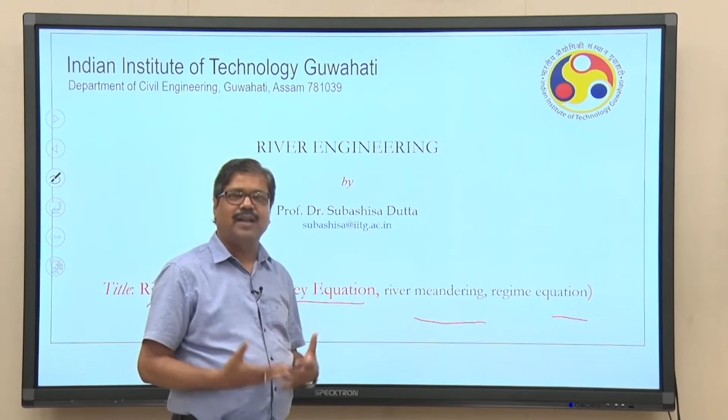Very good morning all of you for these lectures on river equilibriums, in which we will discuss Lacey's equations, river meandering and the regime relationship, which is quite important for us to know. How does a river behave under changing discharge or sediment load conditions? That is the bigger question, and that is what we try to address through the regime equations concept.

Now, if you look at the next part, we are more or less following Julien's book, as well as partly following the experience of Indian Railways engineers on how to protect river banks and river training works for railway bridges. So both these things we are combining to discuss what is the regime concept and how we can use it.

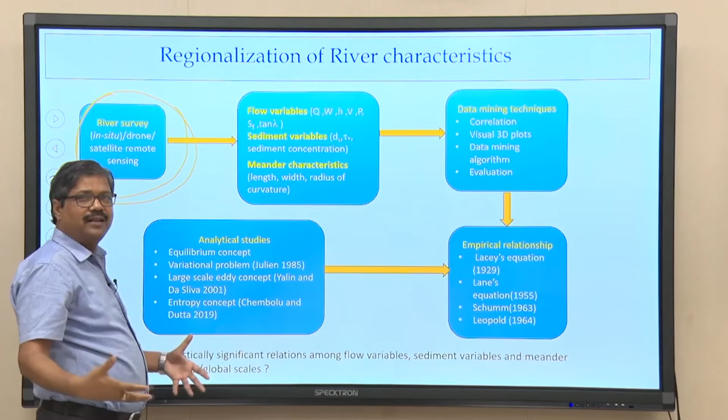If I look at the last slides again, repeating for basic knowledge, first is the river survey, which we can do through field level studies. You can have drone level studies nowadays, or today we can also use high resolution satellite imagery to understand the river planform and river meandering geometries. These are things we can understand about the river and its corridor associations by conducting a thorough survey either at field scale or using satellite platforms.

What do we target? The flow variables, sediment variables and the meandering characteristics. Once you get all this variable data - flow, sediment and meandering - then you try to establish the relationship between them. That is the reason you use data mining tools.

Very older concepts like correlation techniques, now they have 3D visualization techniques, and there are a lot of algorithms in the last two decades that have been developed for data mining from large data sets. There are a lot of examples and also evaluations we can have.

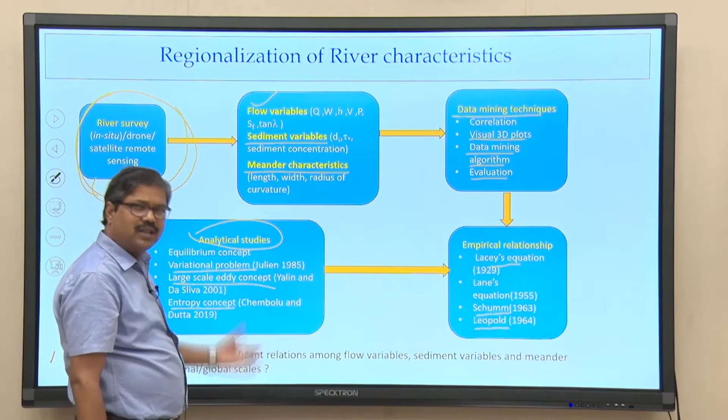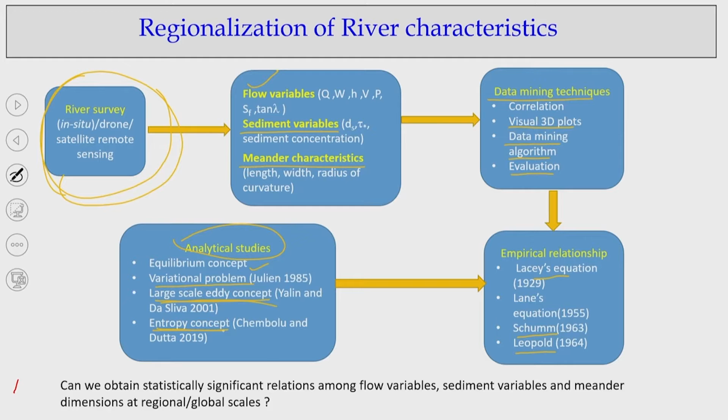So basically these are the equations, the empirical relationships we will discuss today - the Lacey's concept - and as discussed earlier, the analytical studies focusing on variational problems, large scale eddy concept and entropy concept. We try to establish this relationship with the physics: analytical solutions of the river flow with certain assumptions to establish this variation concept, the large eddy concept with the empirical equations, the entropy concept with the empirical equations. That is the advanced level going on, and this is the flowchart of how we can find the regime equations.

Now let me go to the next one, which is very interesting. If you look at the graphical relationships, it talks about a balancing. The river does a balancing between the stream power - that is the energy dissipation - and the carrying of the bed loads. This balancing effect is there in an equilibrium river reach.

So if you look at that, it is a very interesting balance. Try to look at one side as discharge and the stream slope or river slope - discharge multiplied by stream slope indicates the stream power per unit weight, the energy expenditure. That is balanced with bed load and the sediment size.

So if there is an imbalance, either the bank will go for erosion, or there will be aggradation or deposition. If both are balanced, there is an equilibrium stage. If there is a higher value of Q and S - the product of discharge and stream slope, which is stream power per unit weight - that has to be balanced by the sediment size or increasing bed load. That means bank erosion will significantly increase, or otherwise you have aggradation.

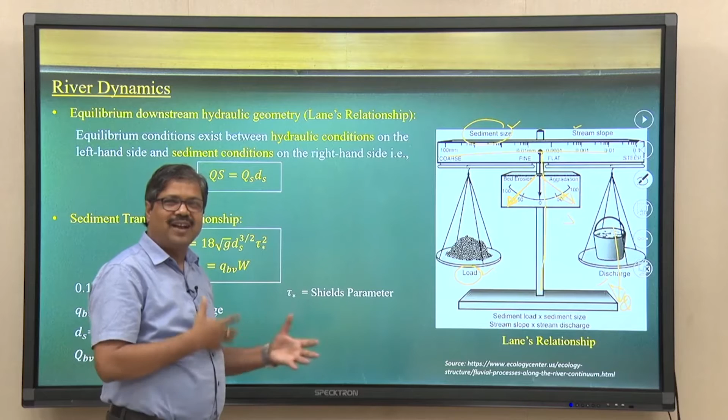My suggestion is that you just sketch these diagrams and try to understand how a river behaves if we change the sediment load, change the discharge, or change the stream slope - like when we do sand mining, we change the bed slope of the river systems.

We have been doing sand mining and gravel mining of the river bed, so we are modifying the stream slope. As we modify the stream slope, what happens - will it be aggradation or degradation? This is a very critical issue in our countries today. If you look at it, you are either increasing or decreasing the stream slope, modifying the D50 value, and mostly we are armoring the bed.

So when we modify the stream slope or the sediment size because of sand mining, there will definitely be a change in the bed load, and because of that change there will be a change in the morphology. That is what we have to try to understand.

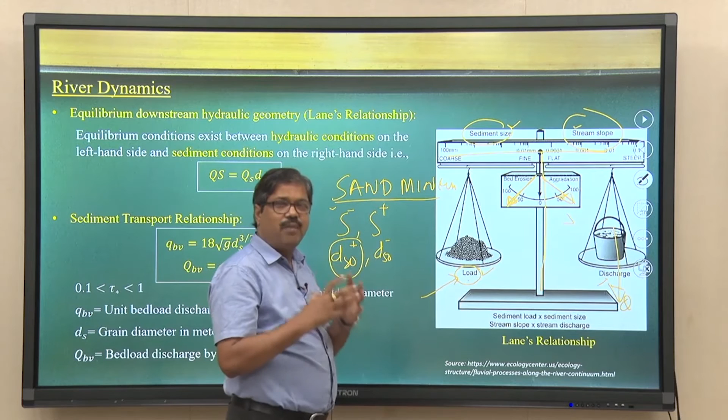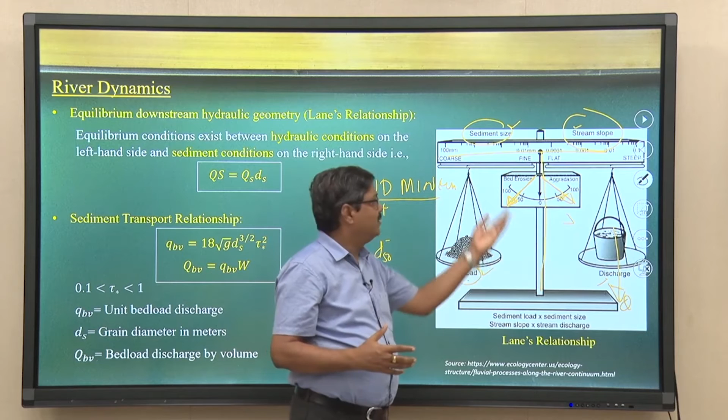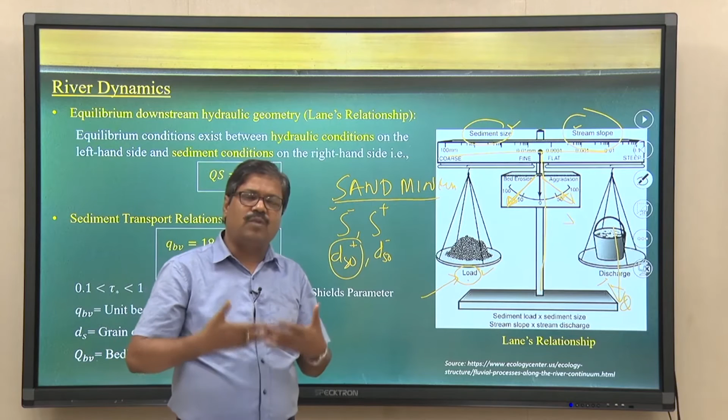When you have an equilibrium river, there is a balance between the stream power per unit weight and the product of the sediment load and sediment size. If that balance is not there, then we can have bank erosion or aggradation - the equilibrium concept breaks down, erosion or aggradation starts, and the river becomes morphologically active.

So if you look at it, this equilibrium concept relates hydraulic conditions on the left side - which talks about stream power or energy dissipation per unit weight - with the sediment conditions on the right side. We have QS, which stands for sediment load, and ds, the particle size, as we discussed earlier.

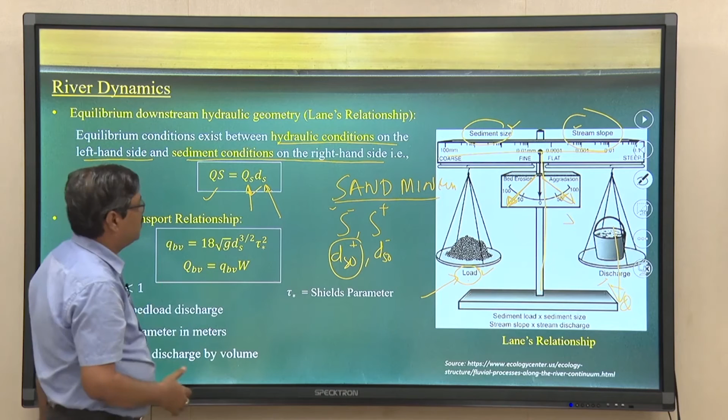Please remember this balance, which describes how we modify equilibrium rivers - whether by conducting sand mining, or in cases where we increase or decrease the discharge, and how that affects the sediment size or load.

If I look at these equations, this comes from a simplification of the regime equations with some assumptions - like the bed transport relationship, where bed load per unit width is a function of ds and the Shields parameter. The Shields parameter is the ratio between the bed shear stress and the weight of the sediment particles, so the bed shear stress part comes in within the Shields parameter.

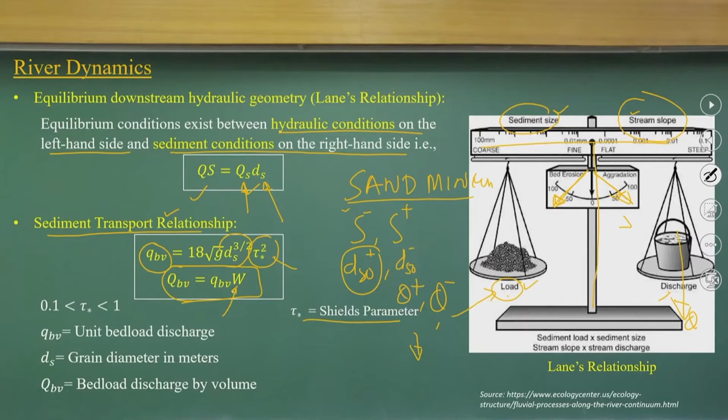Then to compute total bed load, we take the unit bed load per unit width multiplied by the width of the river, and that width we can approximate with the previous regime equations, where qbv stands for unit bed load discharge, ds is the grain diameter in meters, and Qbv is bed load discharge by volume.

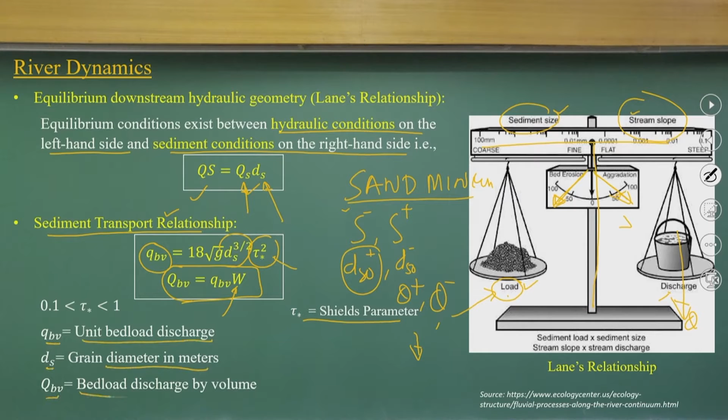Now if I substitute these equations - substituting the W value, which relates Q, d, and S - and rearrange it, I get the same format as in the Lane concept. It's just like the Lane concept, where Q to the power 1.11, S to the power 1.44, and these multiplications are there.

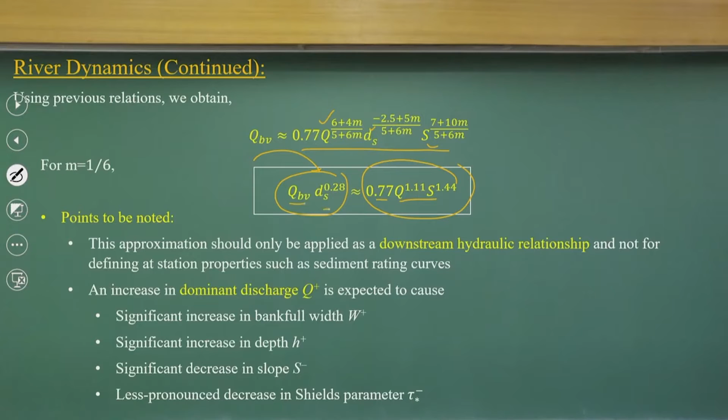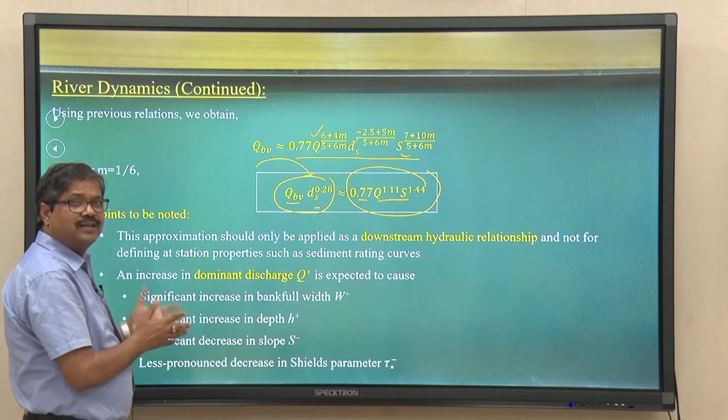This indicates that using the regime equations, I can derive a possible form of the Lane formula, establishing equilibrium between stream power or energy dissipation per unit weight and the river sediment load in terms of bed load. This is a downstream hydraulic relationship - it is not for defining station properties such as sediment rating curves. Please understand it is not for sediment rating curves.

If I increase the dominant discharge Q - expected due to climate change, which will more often increase this dominant discharge - then looking at the equations, to balance that, the width can increase, as shown here, and H can also increase, because as Q increases, we have to increase these to maintain a balancing effect.

So either the bankfull width will increase, the depth will increase, or the slope has to decrease, or there will be a decrease in the Shields parameters. But those are very long term processes to change the Shields parameters, like the D50 values. The bed material of rivers will not change so drastically within a few years or within decades.

It is a very long term process for alluvial depositions. If you summarize, if there is a climate change or deforestation, expecting this dominant discharge to be in a positive trend, then from Lacey's equations we can easily find out that the river will respond with width to be increased, or the depth to be increased, and the slope should reduce.

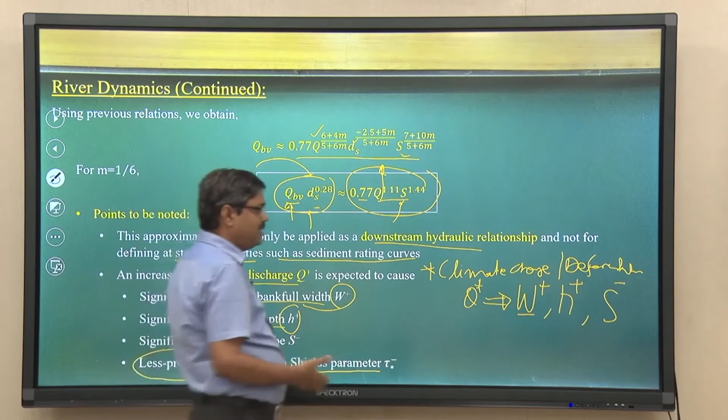That is what I am going to try to understand. We can use the regime equations to know how the river is going to respond if the dominant discharge is in a positive trend. That means, because of climate change or deforestation, the dominant discharge is increasing. If that is the condition, the river width and the flow depth are supposed to increase, whereas the slope can decrease, because other parts like the D50 values, the Shields parameter, and shear stress are not going to change within a few years. It takes longer time, beyond decadal levels.

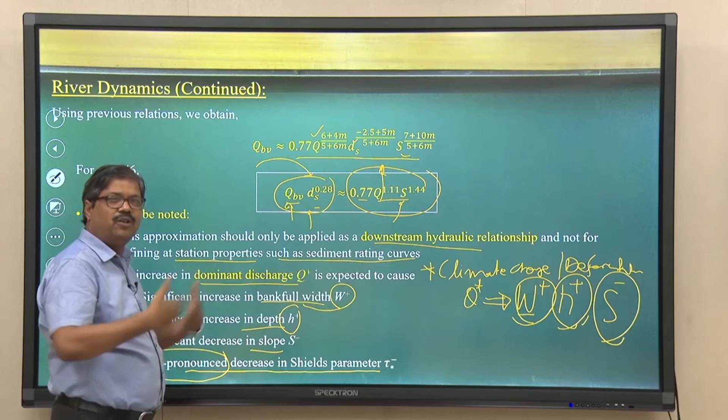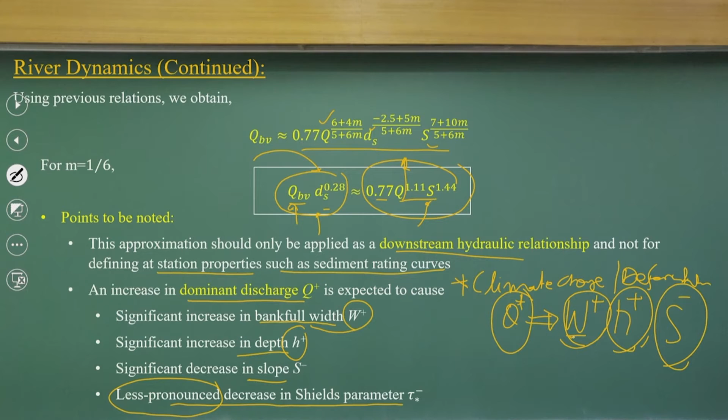So the changing of D50 is like that. If you can understand, if there is an increase in the dominant discharge, that is what is going to affect width and flow depth, and there will be a negative, decreasing trend in the river slope. Now, if you look at the next question, what if the dominant sediment discharge is in a positive trend?

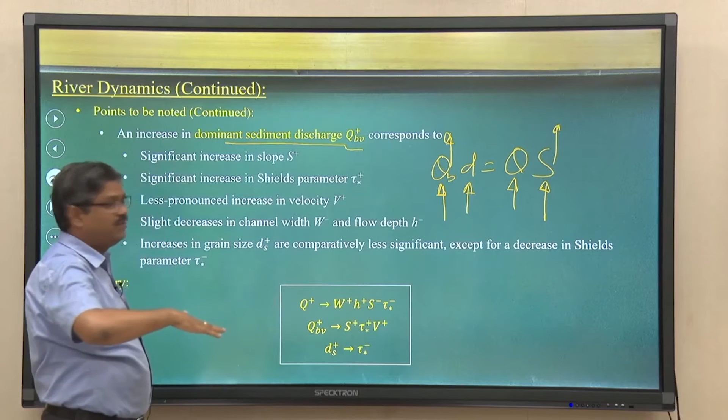Or you can have the velocity increase to balance this part, or you can have a significant increase in the Shields stress values. That is what QB increase means - in part it is shear stress, with a slight decrease in channel width and flow depth. That can happen, but the grain size distribution is comparatively less significant, except for the decrease in the Shields parameters.

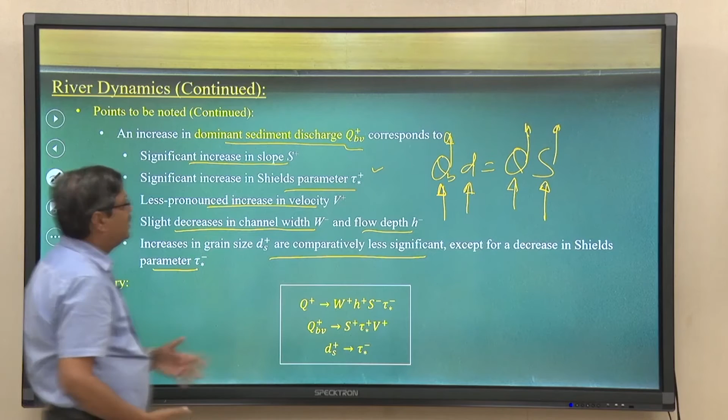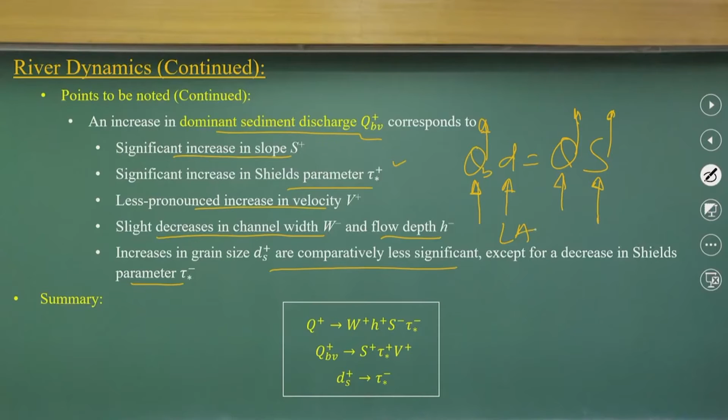So you try to understand how the river is going to be affected if the dominant sediment discharge increases. If you look at this relationship between the dominant sediment discharge with the D values, Q, and S - the discharge and slope of the river - as this QB is increasing, to balance it, either Q has to increase, the velocity has to be in an increasing trend, or the slope has to be in an increasing trend. There may be an increase in grain size, but that is comparatively less significant, except for a decrease in the Shields parameters.

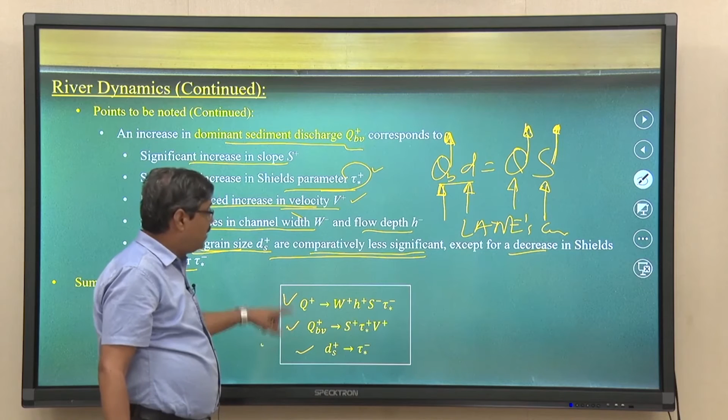So if you look at this diagram, you can try to understand what is happening. When you have a river system, if there is a change in flow or a change in sediment discharge, both will affect the flow geometry in terms of width, depth, slope, and the Shields parameters. If our sediment is increasing, there is an increase in all these factors - the slope, the velocities, as well as the tau star.

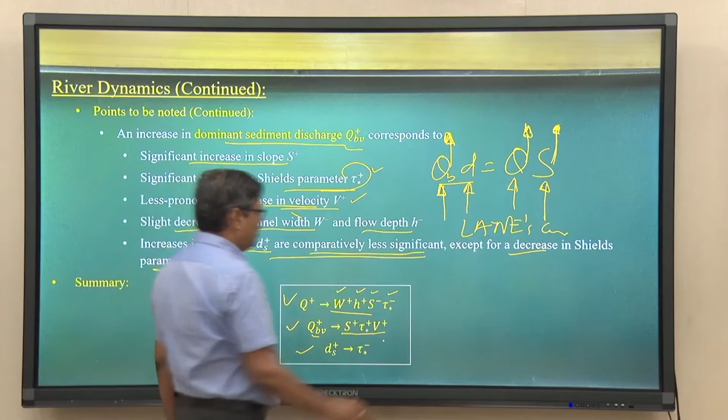So that way you can try to understand the conditions in which we are going to have the dominant sediment discharge in an increasing trend, or the same way you can anticipate if Q will be negative, as you have reservoirs you can regulate the dominant discharge, or if QB, the sediment discharge, is in a negative trend - that way you can also interpret which factors are going to increase and which are going to decrease.

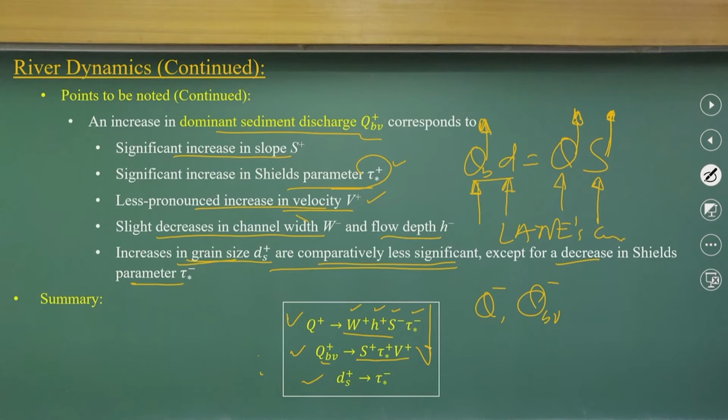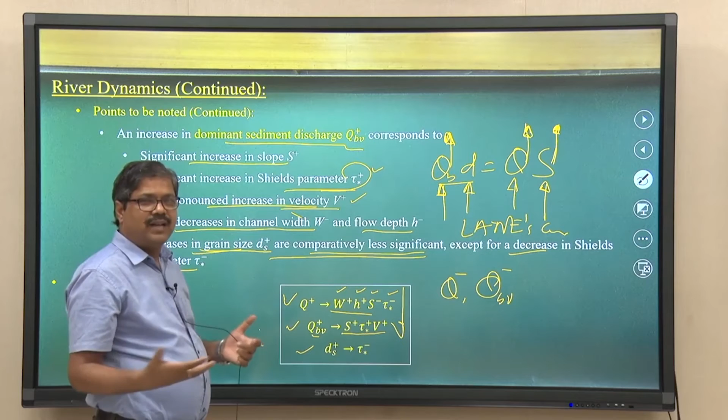The Lane's equations talk about how we can anticipate the increasing trend of the flow parameters, flow variables, or the channel characteristics that we should try to understand.

So when you have lowering of the bed elevation due to the erosion process, if the bed material is fine, channel incision will happen. If the material is sufficiently coarse, river bed armoring is going to happen. For an incised channel, what happens is that outgoing sediment exceeds incoming sediment load. The incoming sediment load is lesser, the outgoing sediment load is more, because it is deepening the channel.

And the stream slope is increasing in the downstream direction, which is just the reverse. Generally as you go downstream, the stream slope should decrease, but if it is an incised channel, you will have an increasing trend.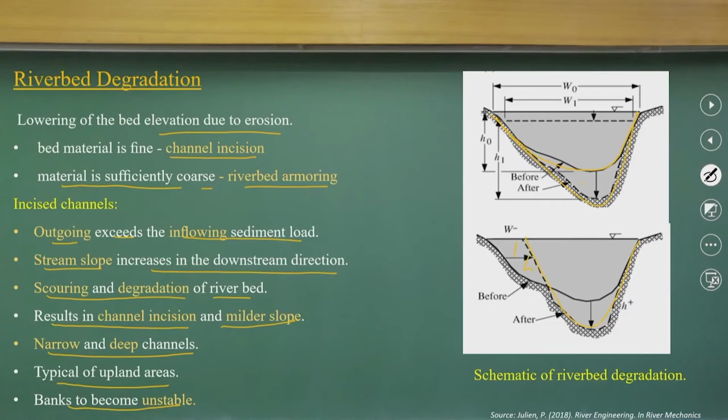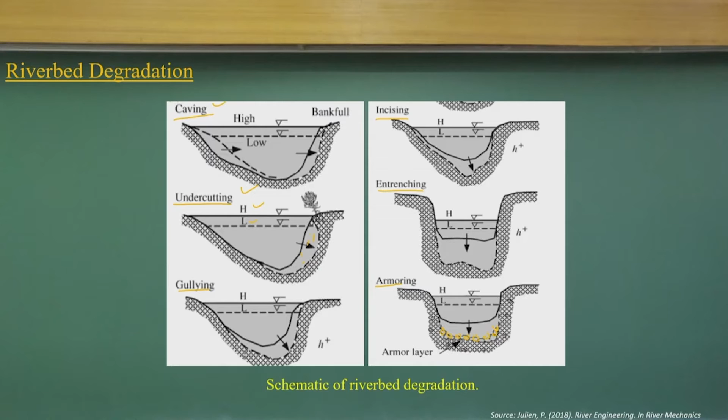You can graphically understand this, it's easy. You can have a caving process, an undercutting process, high flow, low flow, a cutting part, a gullying process, an incising process, an entrenching process, deepening the channel, or armoring processes happening. These figures help you understand how the processes happen. We are not going into more detail, but let us know that as the flow variables change, different types of river degradation can happen.

Now if you look at river planforms, nowadays it's very easy with Google Earth imagery. We can see satellite data and observe what is happening to river planforms. It's very easy to look at.

Look at these rivers which have regular meanders. It's very interesting, these river meanders which are part of the Narmada river. Here the wavelength or amplitude of the meanders is different. If you look at these two rivers, you can see this.

But if you look at sharp river meanders, they can go into a shape like this, go like this shape and come back like this. So river meandering shapes can have a form like this. It's quite interesting.

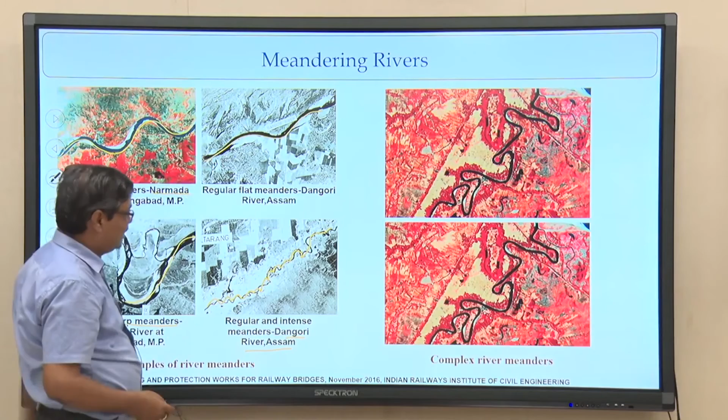Or if you look at the river in Assam's Dangori, the shapes are too complex. Regular intense meanders are there, clearly visible meanders, and there are complex river meanders like this. I'm sketching it to understand nature's art form. Sometimes it's quite regular river meanders, and sometimes very complex river meanders, which we can see from the river.

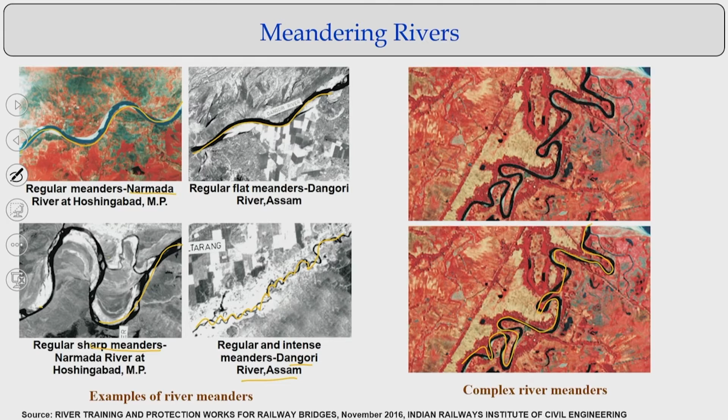It talks about the basic characteristics of the flow variables, the bed materials, the bank materials, all of it. We should try to understand why a river has very regular meanders, or intense meanders, or complex meanders. Let us try to understand this.

Simple river meanders, let's talk about how things happen. If you talk about any river, it can have a shape like this. It's a very simple shape it can follow.

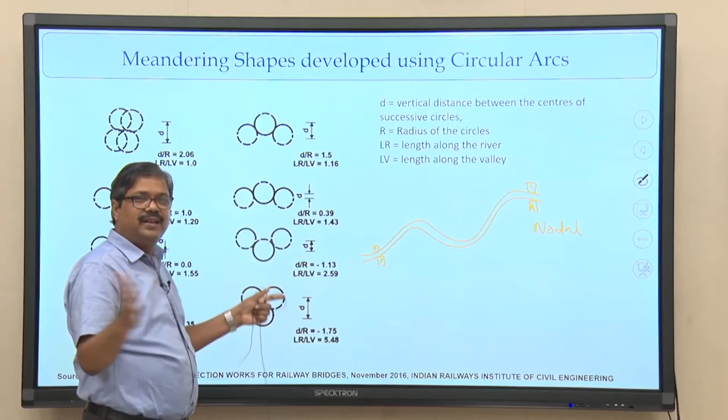A river is controlled by two narrowest reaches, which we call nodal points. So you can see that in a river, at many locations there are nodal locations, where the constrained reach of the river cannot have any degree of freedom. That is the confined part.

So mostly what happens to rivers is that the sediment discharge and the energy dissipation are all changing. These are not constant for river systems.

Sediment, discharge, energy dissipations—all are changing it. So what does the river do to respond to this? It tries to adjust itself.

It shows different reactions at different times. For example, it can behave like this, or again it can follow like this. It can happen that, because at the nodal reach it is constant, or it can follow this way. So with two constraint locations, a river can have a different response.

To understand these very complex rivers, we always look at a simple way using circular arcs. We can define the river behavior between two constraint locations, how it behaves over different years, how rivers are behaving, by trying to fit different circles.

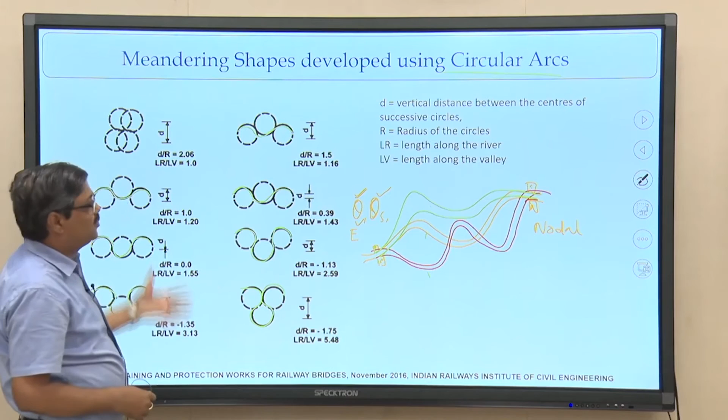With circular arcs we can define these meanders, and that indicates for us the science to know the ratio between d by r. D is the vertical distance between the center of successive circles, and r is the radius of the circle. Lr is the length along the river, and Lv stands for length along the valley.

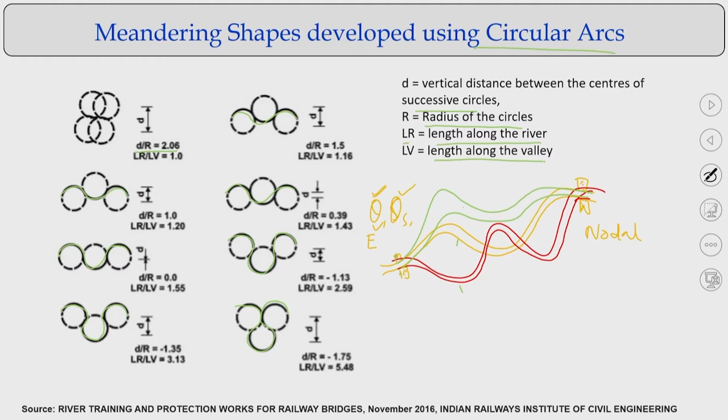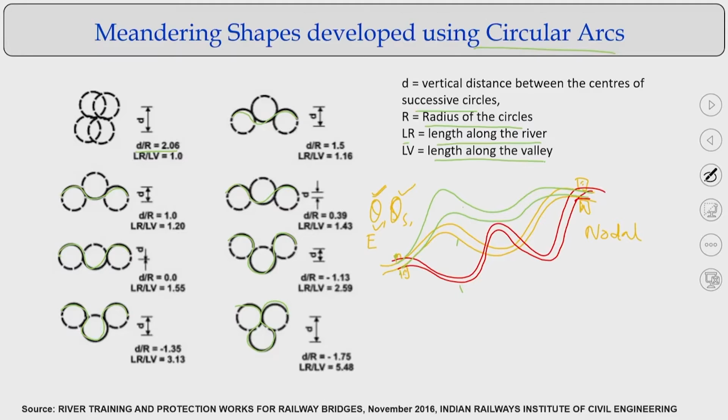So this way the river can have different responses, and we should try to understand why it happens and how the river responds in different ways. This is really interesting work, and we should look at more advanced levels of how the river responds between two nodal locations under different conditions. You can see it next, I will slow it down.

There is much debate about this meandering process. Many say it is secondary flow that plays the major role, along with perturbation theory, and stream hypotheses like minimum stream power and minimum variance concepts.

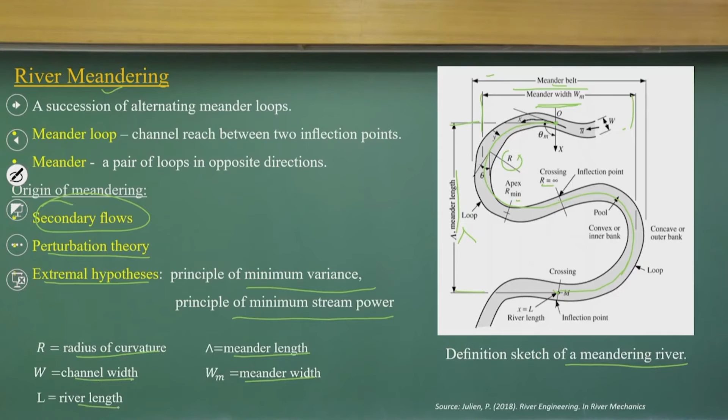But if you look at it this way, we try to understand the meander length, meander width, radius of curvature, channel width and river length, considering theta as a cosine function along this length—the x distance along the river. If theta varies as a cosine function of x along these curves, we can compute the meander length, the length along these curves, from these functions.

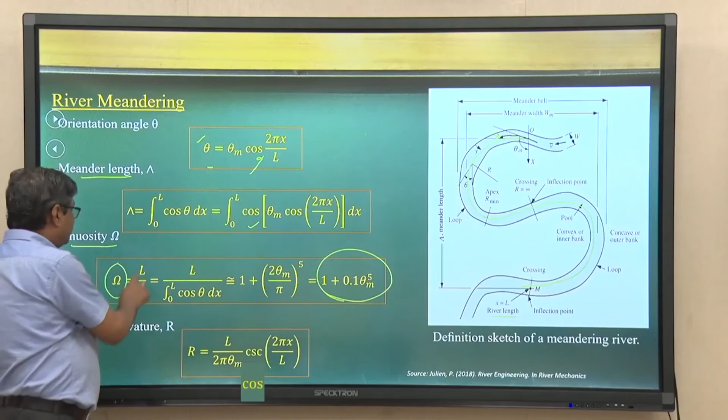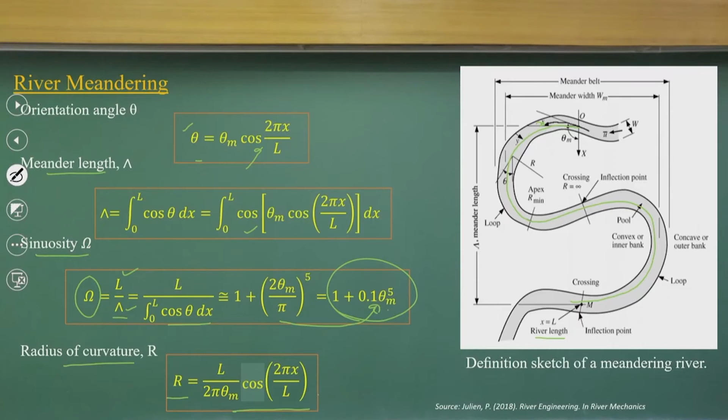By this we get the meander length, which is a function of theta m. We can also get the radius of curvatures, which is just a geometrical formula we can establish, and we can know what the radius of curvature will be. If we look at minimum radius of curvature, we can get the meandering width also, as a function like this.

If I plot it, looking at the properties of meandering rivers, I plot it with sinuosity, a non-dimensional form with meander length by Rm, a non-dimensional ratio. If I put it, what I'm getting is there are 3 clear cut zones. Here we are putting theta m. So when theta m in degree scale is more than 110, then a neck cutoff will happen.

Below 30 degrees you can call it sinuous reach, then it is called meandering reach. And if you try to plot how sinuosity increases, how this meandering width by length increases, how this minimum radius of curvature behaves, that is the way we can characterize the reaches in terms of 3 classifications: sinuous, meandering, and neck cutoff.

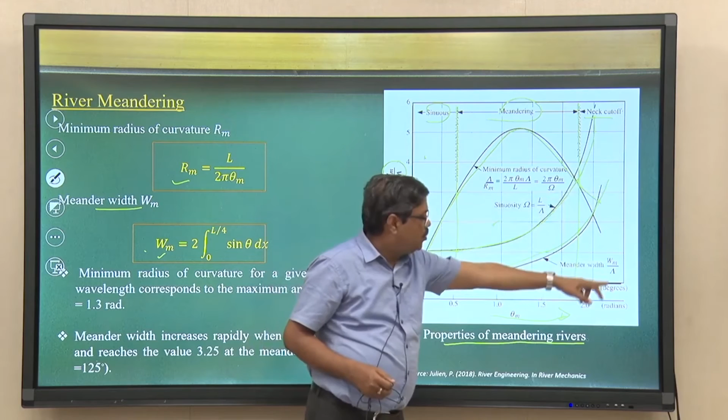How do they behave in terms of sinuosity? That means as theta m is increasing, your sinuosity is going to increase. Meandering width is going to increase, the ratio between Wm and meander length will show an increasing trend, and the minimum radius of curvature will follow this. These indicate the characteristics of what happens when you have a minimum radius of curvature for given meanders.

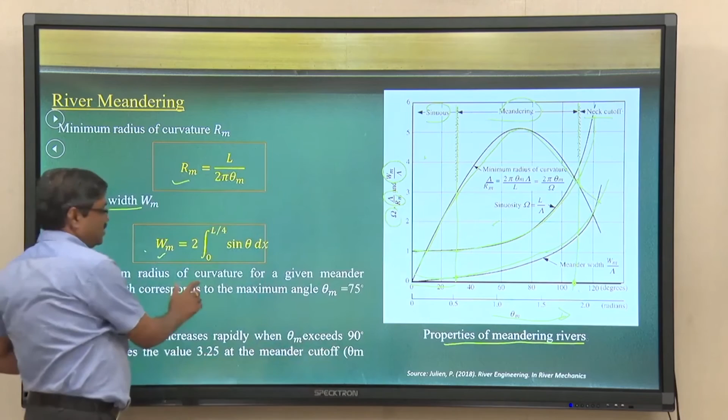The value coming out is 75 degrees. Okay, that is what you can look at. Meandering width increases rapidly as theta m exceeds 90 degrees, reaching the value 3.25 at the cutoff. If you look at these values, it reaches around 3.25, after which this process is cut off.

So as theta m exceeds 90 degrees, the meander width increases rapidly in this zone, and reaches the value 3.2 where meander cutoff happens, at theta equal to 125 degrees. So the cutoff happens here at 125 degrees. These are the basic characteristics.

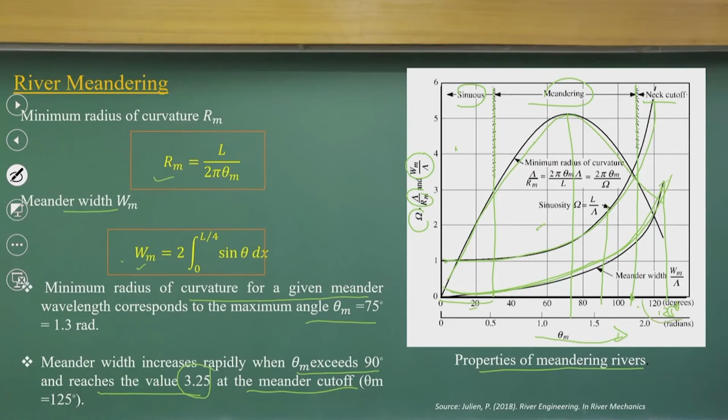If you have knowledge of the meandering characteristics, we can identify at what conditions the meander cutoff is going to happen. Now, let's look at lateral migration, river migration. Rivers also migrate in the lateral direction.

If I quantify the energy gradient along the valley, this is the ratio between energy losses over a meander having the wavelength and the friction slope Sf. We can compute the energy losses in the valley direction, and the energy losses in terms of the basic sinuosity function.

If you try to look at it with theta m and the reach sinuosity, try to understand these figures, which are very interesting. The figures indicate that for a river meander, you have a theta m value in radians, and also a ratio between radius of curvature and width, along with the sinuosity values.

The functional relationship shows transversal shear stress follows like this, longitudinal shear stress follows like this. Just look at it - this relative shear stress is shown for the transversal and the longitudinal components. Quite interestingly, at a sinuosity of 1.34, corresponding theta m and Rm/W values, at that location the transversal shear stress is much higher. After that there is a decreasing trend, and before that as well.

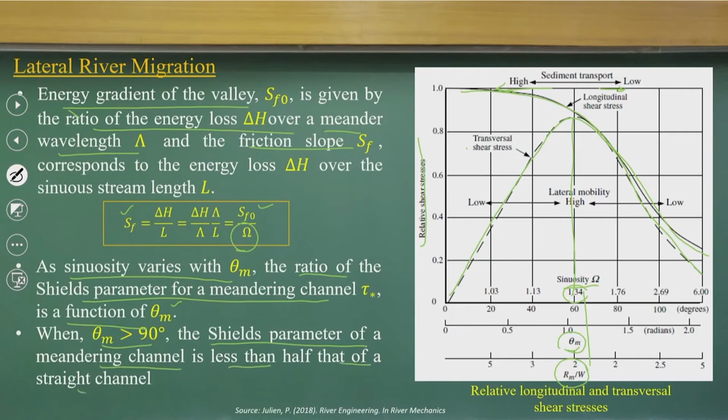The ratio of the Shields parameter for meandering channels is a function of theta m. When theta m is above 90 degrees, the Shields parameter of a meandering channel is less than half of the straight channel's value. So you can try to interpret these graphs giving a relationship between theta m, the sinuosity, and the relative shear stress.

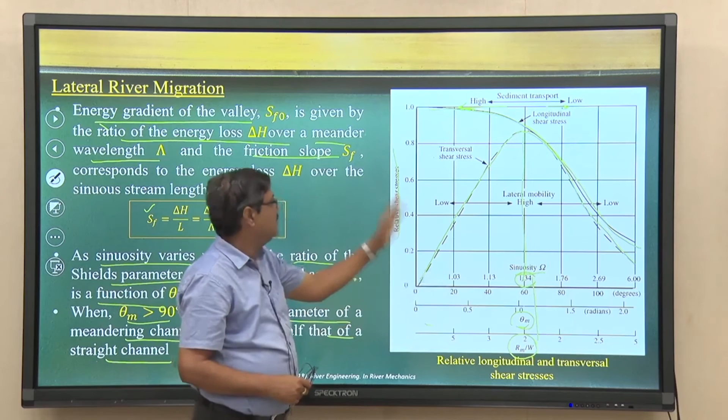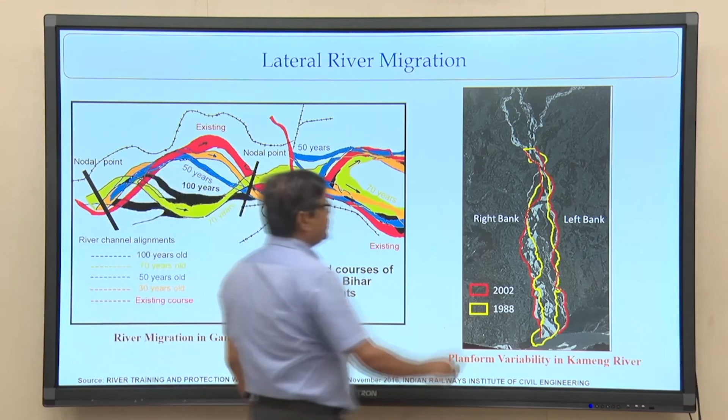That understanding can give us how the lateral river migrations happen. If we look at these two figures, let us discuss the Kameng river, which has data from 1988 and 2002, a span of 14 years. If you look at that, these are nodal points where the rivers are something like this, and further it changes, the rivers become like this. So there is a lateral migration of the rivers.

So if you look at that, there is lateral migration of a river, or I can say rivers behave like pendulums. If this is the nodal location, this is the location of the nodal points, the river behaves like a pendulum. So it goes like this, just swinging.

What is the time period of this swinging is always a big question mark. What is the time period? Does it take 4 years? Does it take 12 years? Does the time period exceed 50 years? We do not know.

That's the concept we should look at, and if you try to understand it, it works like a pendulum, and it has a time period. What is the time period of these lateral migrations? We do not have a much precise answer for that.

But if you look at the river course, 100 years old, 70 years old, 50 years, 30 years existing course of river Ganga at Patna, there are two nodal locations. That is a nodal location, this is also a nodal location. The two are confined. The nodal locations are there, two confined nodal locations.

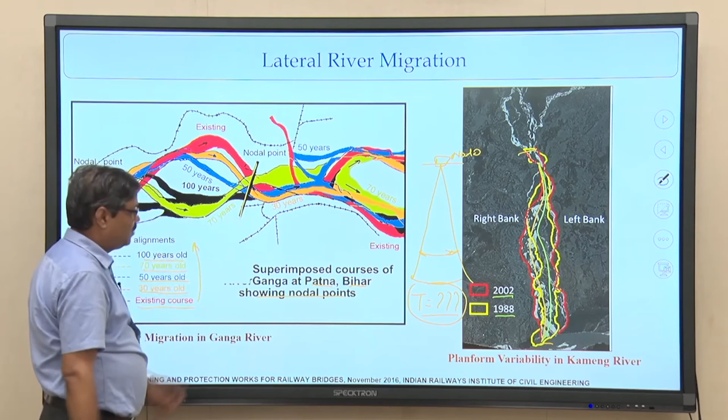The rivers are weaving. It's a very good picture provided by the Indian Railways Institute of Civil Engineering. You can interestingly look at what is happening with these rivers, how this existing channel is behaving.

If you look at 70 years back, it was here, and these channels again bifurcate here. So the bifurcations are happening here, and these are oscillating behavior. As I said, in this case it is oscillating between the two points. If I look at that, I have a string, it can oscillate like this, it can have oscillations like this.

Just try to understand it. If there are two points and the string can oscillate in the lateral directions, it has a time period. Here you can see the river 50 years back, the conditions, and 100 years back, and 70 years back it was here.

So it just moves from north to south. The river flows from west to east, as you know, west to east, with northern bank and southern banks. So if you look at this river, very interesting figures are there. 70 to 100 years back, the river used the south bank. Now it has shifted to the northern bank. We do not know how long it will be there. Maybe another 50 years it will return back to the south bank, and how these things are happening here.

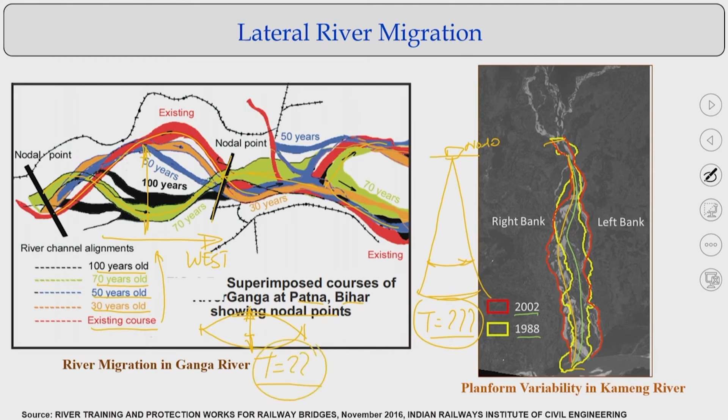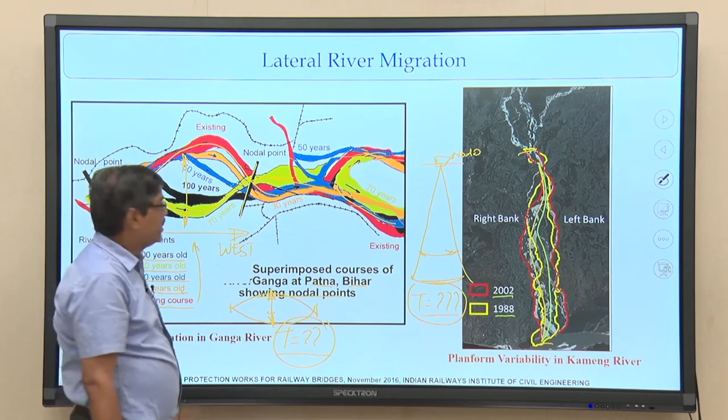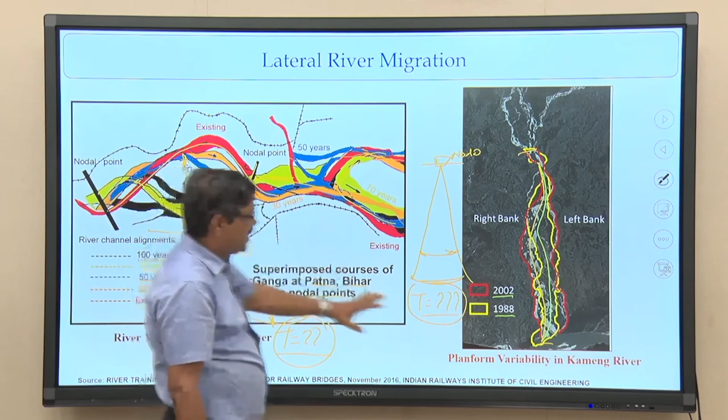So these time periods of oscillation in lateral directions are all big question marks for us, and we should try to understand our river systems, how they behave as lateral river migrations. There is a lot of data nowadays available, old data and new data sets that we are capturing. We should try to look at how these time periods indicate behavior for the two rivers, one the Kameng river, another the Ganga river at the Patna location.

Now coming to a regional relationship, which is very interesting to know, way back in 1863 Ferguson established that ML, the meandering length, is 6 times the width, which is necessary to know to give enough space to the rivers. That means if the width of a river is 1 kilometer, the meandering length will be 6 times that, it will be 6 kilometers. That is what ML is.

MB is the width of meander belt. So we are talking about this width of meander belt, which in 1902 was very simplified. I can say that the meander belt, if I approximate it, is 18 times of W. Is there a spatial frequency? It also maintains the ratio of 6 and 18 for rivers.

Just try to understand it. That means, if I know the width of the river, say half a kilometer, then 9 kilometers is the meandering belt width. If a river width is 2 kilometers, then 36 kilometers is the meandering belt width.

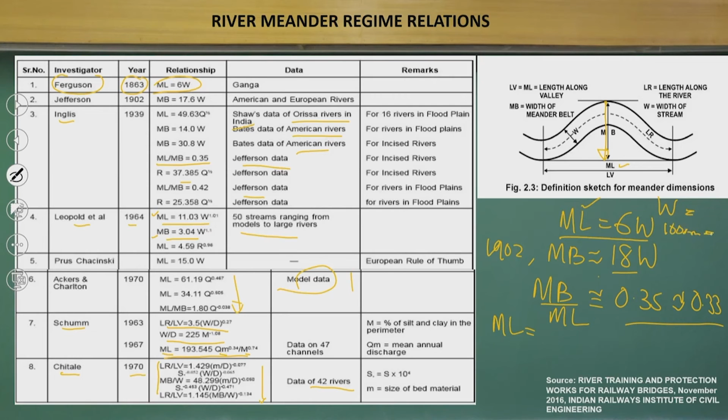And also we talk about width and discharge in the same order. If width is 1000 meters, we will have a discharge of about 10,000 as dominant discharge. So you can try to understand how things happen in terms of dominant discharge, ML, MB, and this.

So what I am telling you is that if you look at these regional relationships developed way back 100 years ago, it also tells a story to us. Either we have to accept it, or we have to understand it, considering that we can understand the rivers.

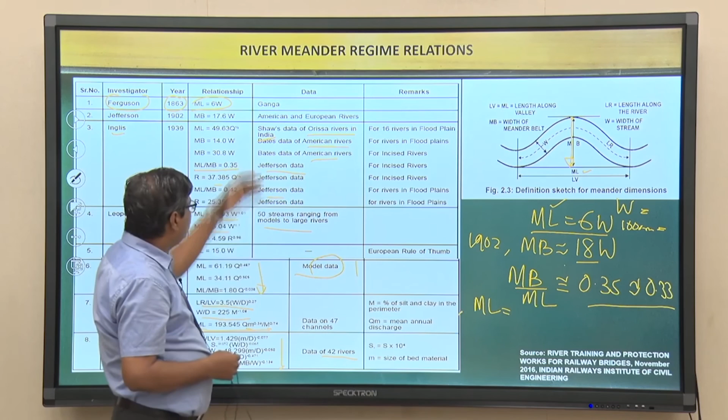More precisely, now that we have more data, we can always look back at these regime equations to see whether they are valid or not. Because if you look at these equations, they are different, but what order of difference, when you talk about rivers with flood plains, incised rivers, rivers in the flood plain...

this is the 50 stream, regarding the European rule of thumb. The thumb rule says that you have a silt-clay percentage which controls these characteristics, mean flow, discharge, you can have this series and you can have this.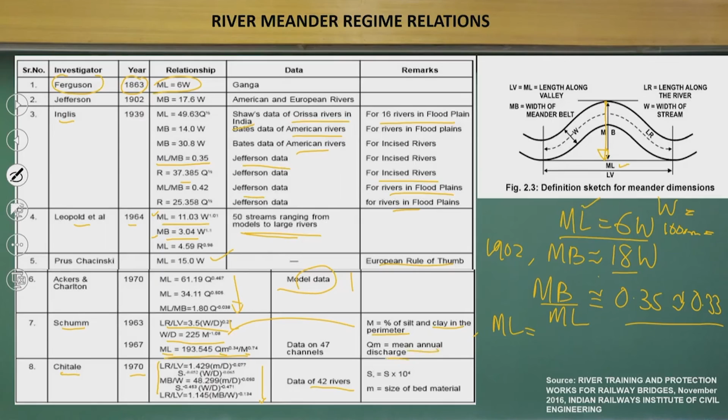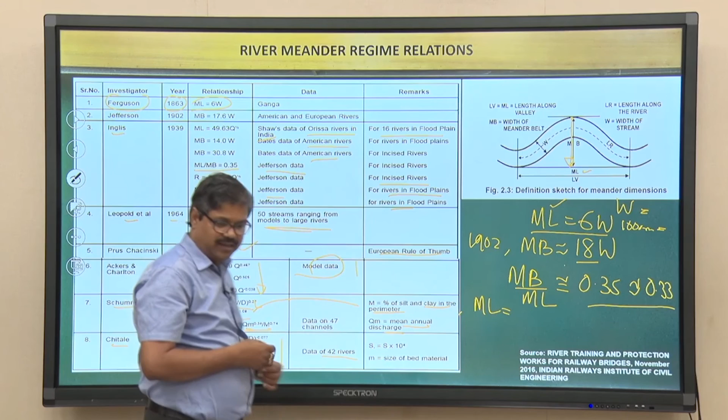So we should have a better understanding of how these empirical equations provide us knowledge, and that knowledge of rivers we can implement when trying to design river training works.

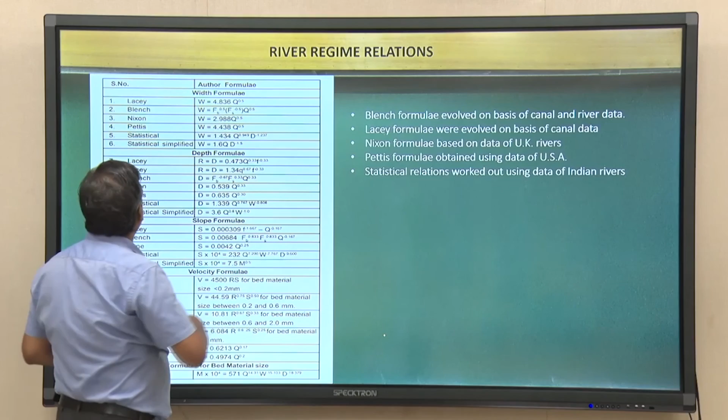Now, if you look again, it is a compiled form of river regime relationship in terms of width. Width formula, depth formula, slope, velocity, and bed material size. If you look at these formulas, Lacey's formula is evolved from canal data, which we discussed in the last class.

Nixon's formula is based on UK rivers. Pettis formulas are from USA. The statistical methods are from Indian rivers. Also, we have Blench formulas from canal and river data. If you look at that, the canal is more

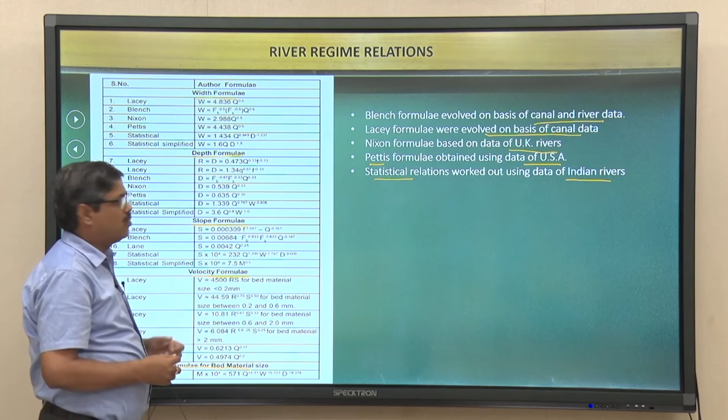geometrically regular and the bed material-wise there's not much variability, but rivers have a lot of variability. If you look at Lacey's equations, again, W equals 4.8 times Q to the power 0.5, that is, a 0.5 square root.

The same way, if I look at Pettis formula, which is from USA data, the difference is in the coefficients: 4.4 Q to the power 0.5. So only these multiplication factors are changing, a into Q to the power b. Nixon's is the same. So these width formulas are more or less the same, but in Indian rivers we have W equals 1.6 Q.

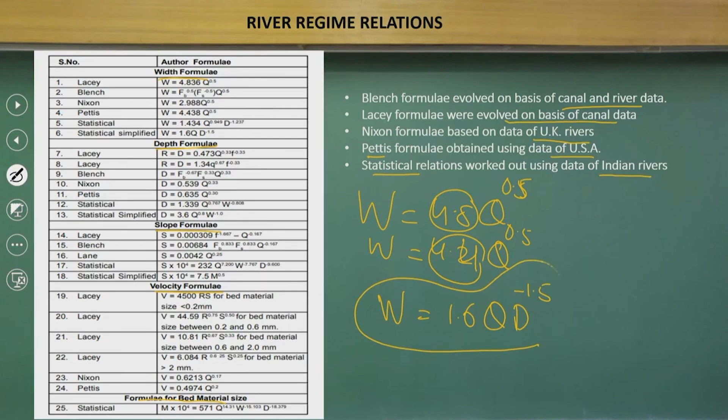D, the flow depth, is to the power minus 1.5. So Indian rivers have a different relationship compared to these. Why? Those questions we can always look at. Now if I look at the depth formulas, it is very interesting.

Nixon's and Pettis formulas give the flow depth as a function of 0.539 Q to the power 1/3, whereas Pettis formula is just slightly modified, with 0.635 Q to the power 1/3. So only these coefficients of the two are changing.

We can know the flow depth if we know the dominant discharge accurately. In case of the Indian river, the statistical part is modified, giving 3.6 Q to the power 0.8, also as a function of width. So in Indian rivers this holds, but Pettis formula is from USA, Nixon's formula is

derived from UK rivers, and they're more or less the same, but when you talk about Indian rivers, we have different values, and we can get the flow depth using Lacey's equations. So this always indicates that we can have some sort of regional equation.

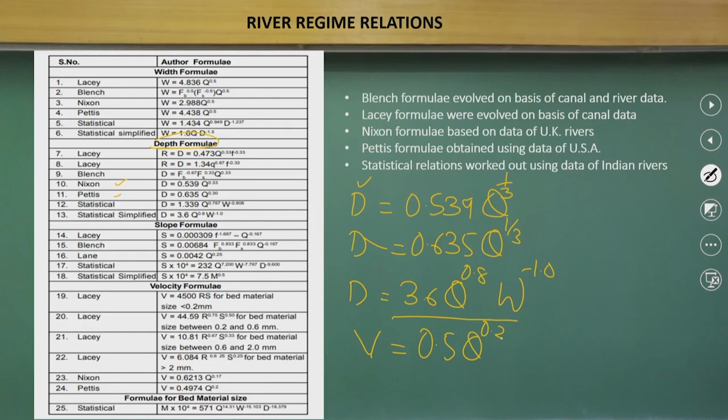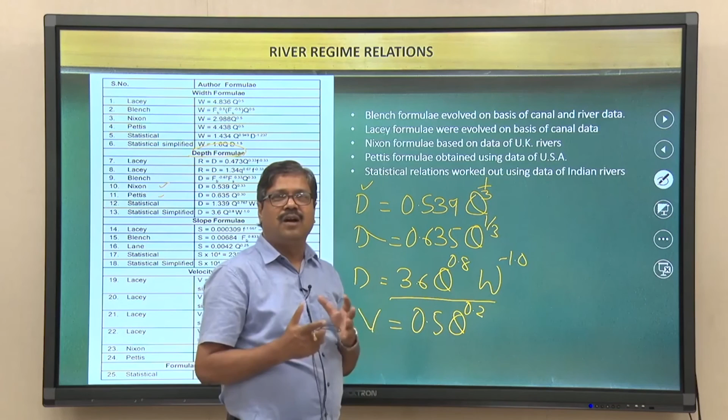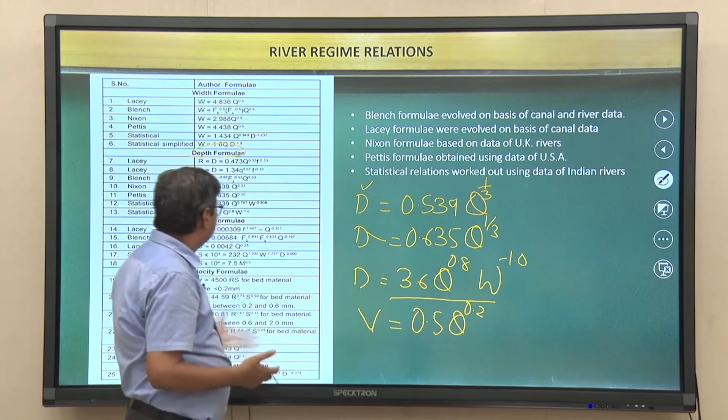But before concluding, these regional equations are good only if derived properly with more reliable hydrologic data, like reliable discharge data, flow depth, and width. Having a more reliable data set and deriving these regional equations really plays a major role for river engineers.

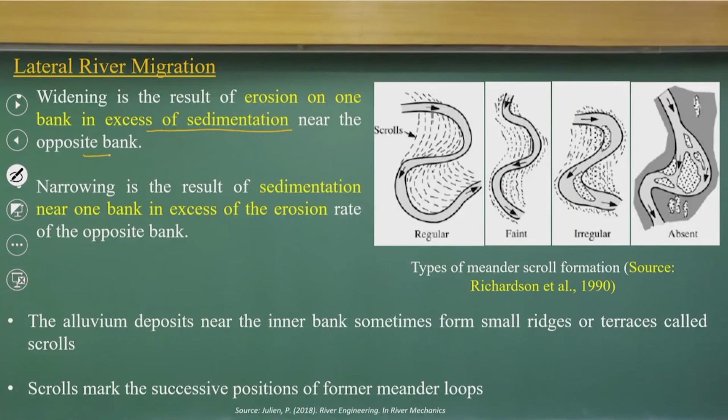Now, looking at the next level, how do lateral river migrations happen? Look at the behavior of winding rivers, erosion happening, excess sedimentation near the opposite banks. This can happen regularly, irregularly, or be absent - these are types of meander scrolls. It can have narrowing resulting from sedimentation near one bank in excess of erosion on the opposite side, which can be understood in a simple way.

How does river meandering happen - types of scrolling that can be regular, faint, irregular, or absent can also happen.

You can get the history of Patna city and try to know how things evolved in this riverine city, one of the oldest in the world, which is the story of the Ganges and Patna city, particular to Bihar. Thank you.